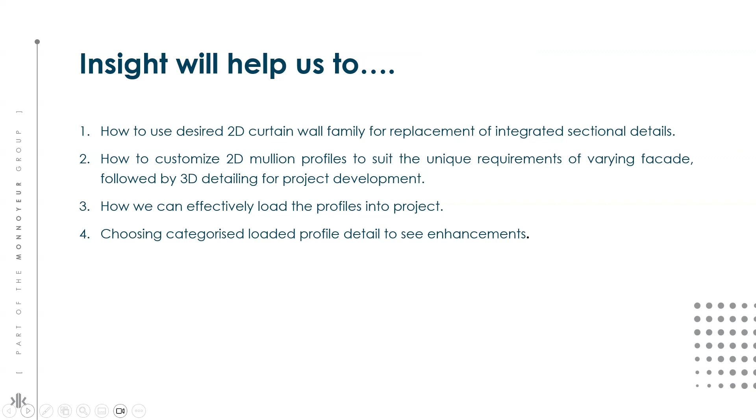Let us just move on to the live demo now.

Here I am on my user interface screen, and as you can see, what we are going to discuss in today's insight is the new upgradation that has come to Revit 2025 with respect to Mullion upgradations, where we can detail out our Mullions, which will be in the form of 2D profiles, but it will be visible to us on a project as a 3D profile with detailings.

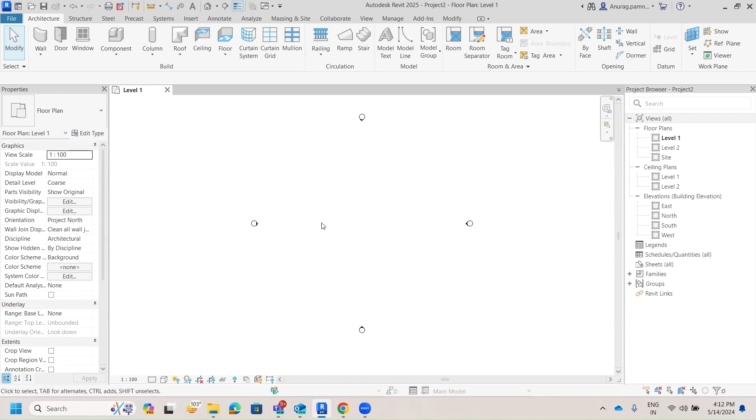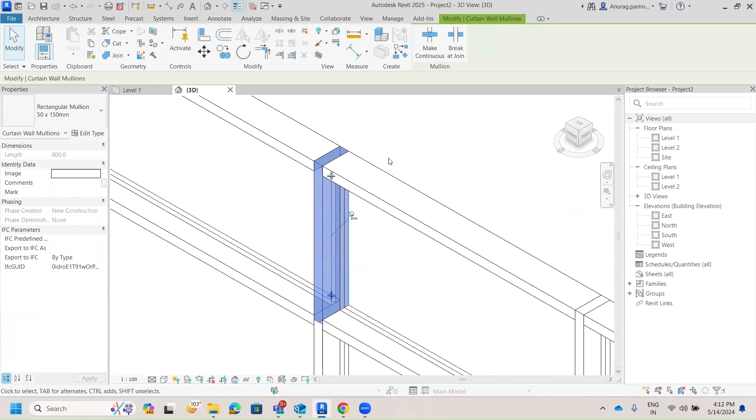So I would just be making a wall, which will be a storefront wall. And as you can see, I have just modified this. Over here, now you can see all these are like rectangular sections without any detailings. If I just move on to the 3D part of it, we can see these are rectangular parts of a Mullion. So now we are going to detail it out.

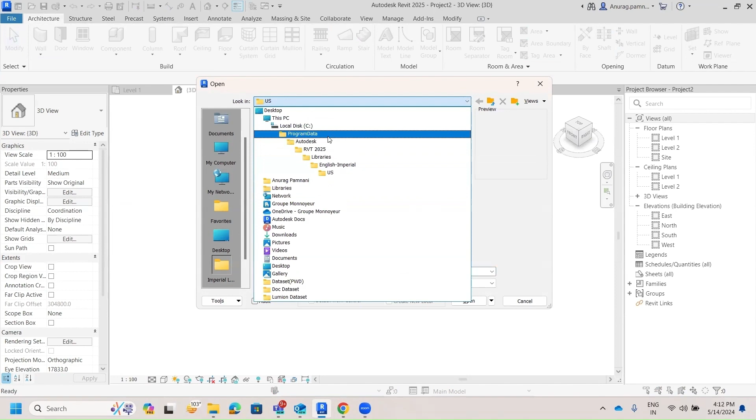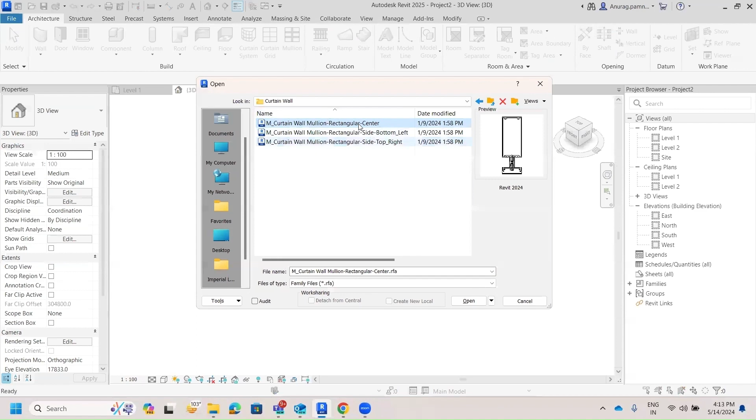The very first thing I would be doing is going on to New Family, and I will open a family. Over here, since I don't have it on 2025 families, I would go on to the 2024 folder. I would be having these families under the English section, I would have this profiles, and under the profiles, I have this curtain wall mullion. So you have the central part of it. Now I will just open it.

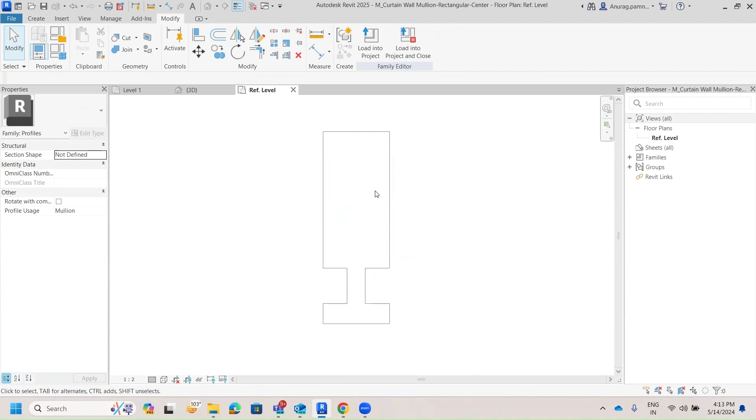Now you can see this is how the detail item needs to be looked onto the part of the Revit project as well, which was not visible in our project. So how we can work upon this is we just need to delete it and we will get a basic profile. Now, if I need a box section, suppose I would just start offsetting it. The range is 5, let me make it 3, so I will be creating a box section.

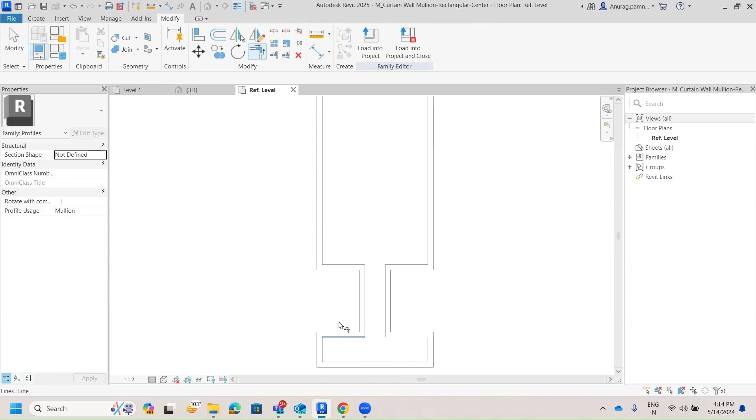So this is the detailing that I need to project onto my project, right, which is a box section detail. So this is a 2D profile itself, but as soon as we load it onto our project, it becomes a 3D part of it. I will just load it onto my project.

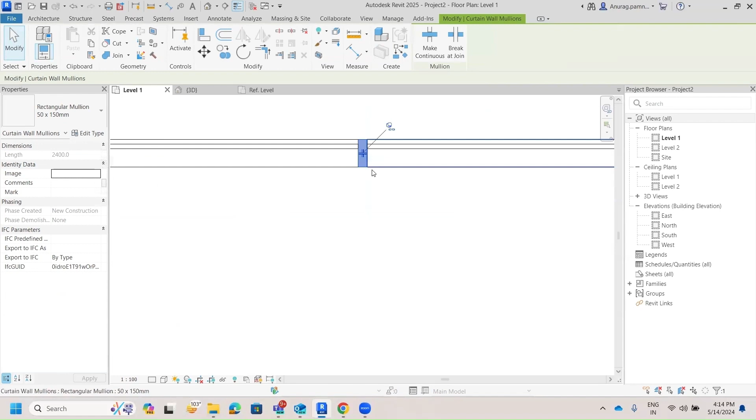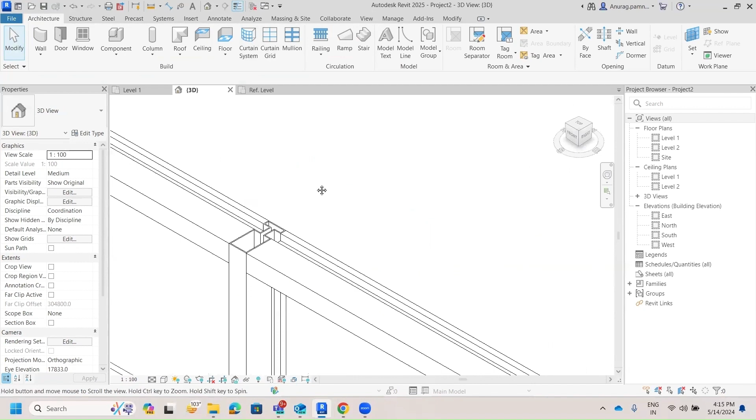The project is being loaded. Now I will select this entire profile version of it. So let's do this. Whenever you select this profile, the Edit Type comes up where we have to upload that particular profile onto our project. This was, apply, and okay. Now you can see the entire profile has been changed onto this. And if I move on to the 3D part of it, you can see it is now acting as a box section. So this is how we need to work upon the drawings.

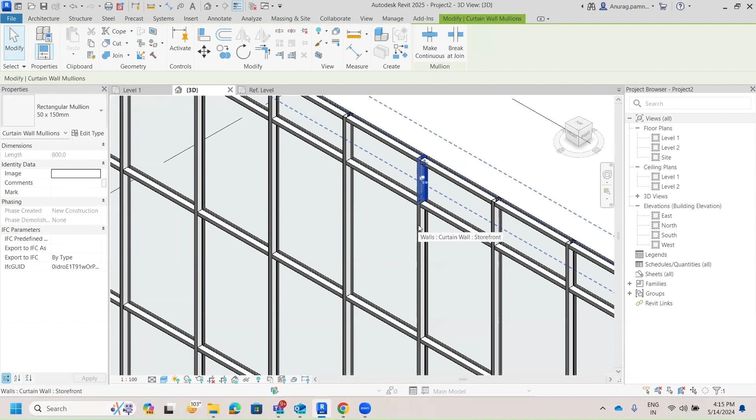And if I make it shaded, you can see this is completely a 3D profile of a 2D with detailings. So this is actually something which was not happening in earlier versions, and now it has been updated with respect to 2025, where we can detail out the 2D part profiles and load them onto a project directly and work upon them.